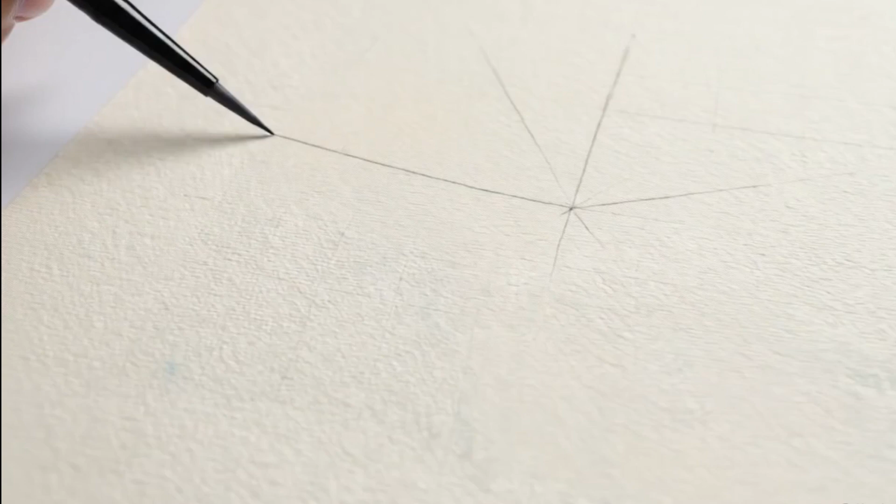Every piece of physical infrastructure begins with a mathematical abstraction. Surveying is the foundational science of determining the exact three-dimensional position of natural and man-made features. But civil engineers face an immediate problem.

The physical surface of the Earth, known as the geoid, which is based on gravity and mean sea level, is incredibly irregular. Its lumpy geometry makes direct mathematical computation impossible. To build anything, that chaotic physical data has to be translated into a smooth, computable shape called a reference ellipsoid.

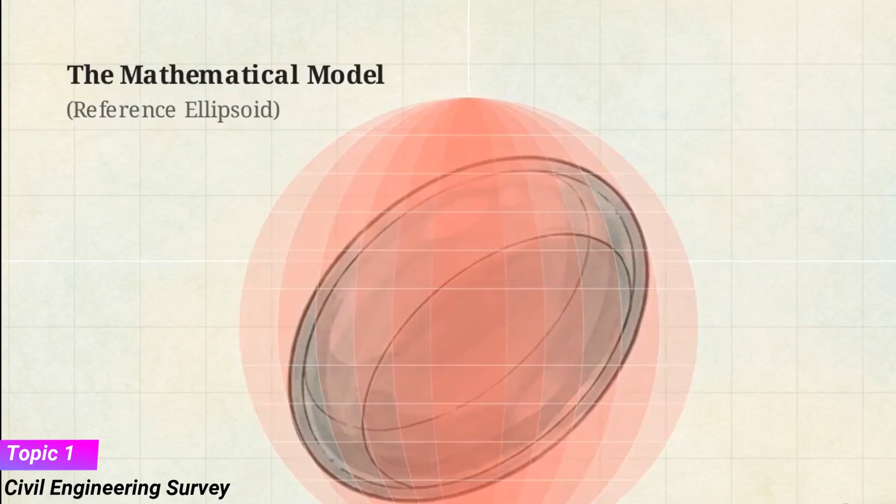For smaller, localized projects, surveyors project this data orthogonally onto a flat plane, resting tangentially against the ellipsoid, allowing engineers to work with standard plane geometry. However, this flat Earth assumption has a strict physical limit. Once a project extends beyond 10 to 15 kilometers in any direction, the curvature of the Earth creates a massive mathematical gap between the flat plane and the ellipsoid.

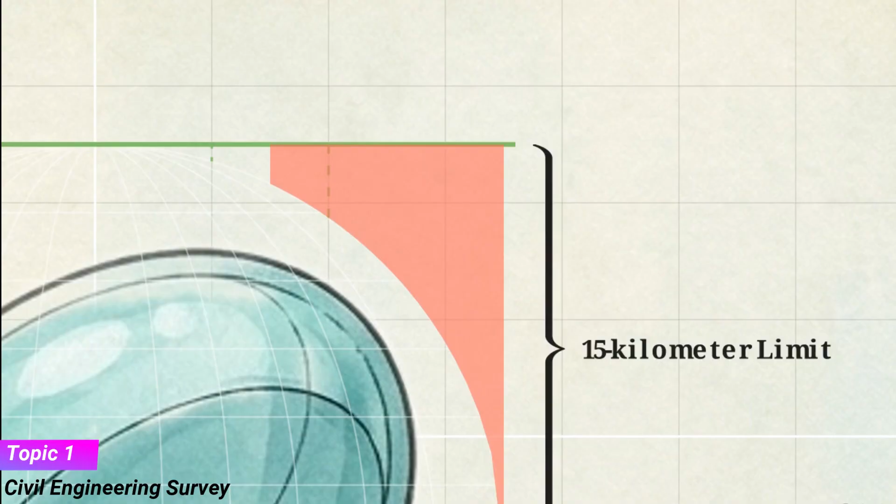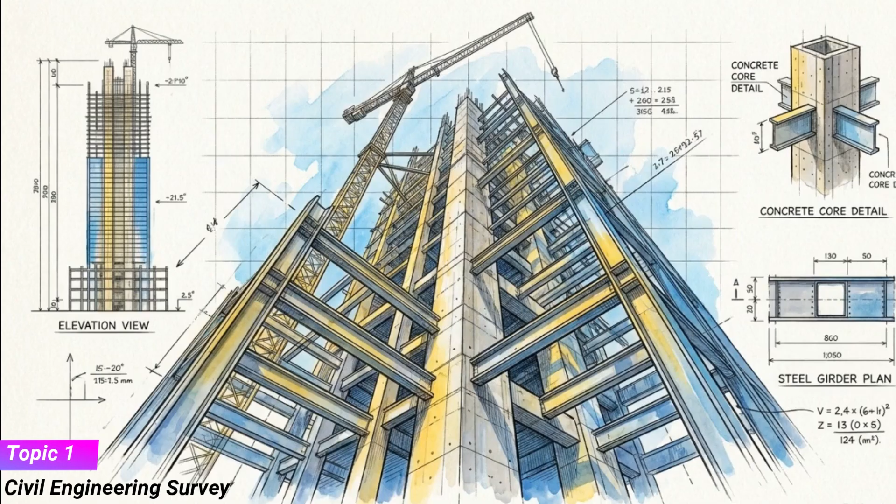Bridging that gap and converting raw planetary geometry into usable construction data requires highly specialized domains of practice. Without this precise mathematical translation and a computed coordinate datum, safe infrastructure design is literally impossible. To manage the vast scale of physical variables, spatial data collection is divided into 4 primary branches.

The first is engineering surveying. During a project's design stage, engineering surveyors capture large-scale topographical data. This forms the basis for digital ground models, or DGMs, ensuring the architect's plans actually fit the existing terrain. Once construction begins, this branch pivots to setting out.

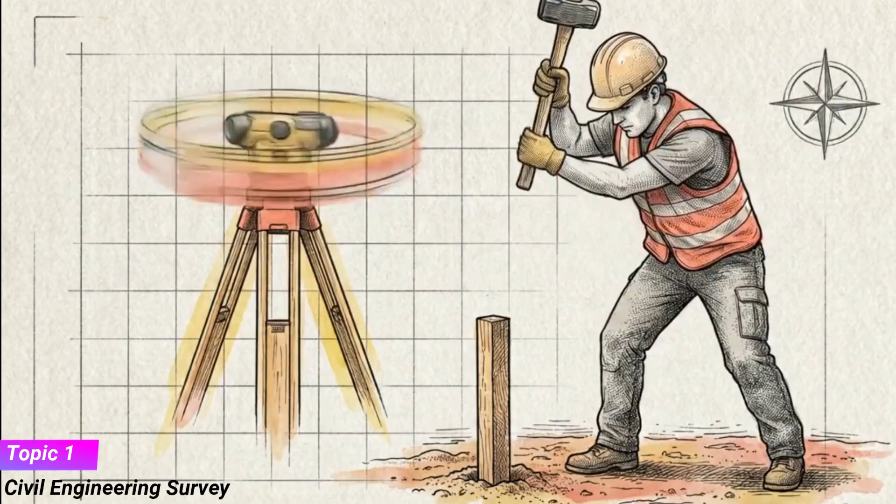This is the process of taking those abstract digital coordinates and establishing physical marks on site, guiding the exact placement of structural elements. Even after completion, surveyors remain involved. For massive retaining structures like dams or bridges, they monitor long-term deformation to ensure ongoing stability.

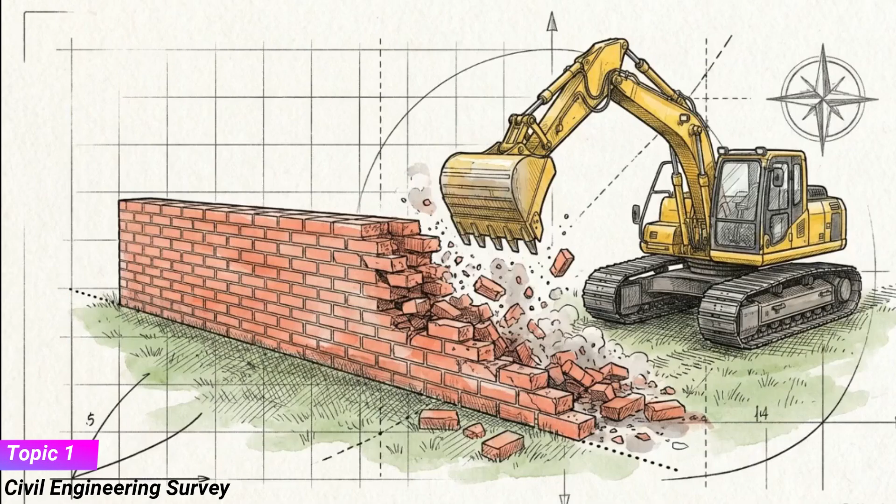The second branch is cadastral surveying, which is strictly concerned with the establishment and management of legal land boundaries. A structure built across a boundary line requires either purchasing the adjacent land at a premium or tearing down the work. Cadastral precision prevents these multi-million-dollar encroachments and territorial disputes.

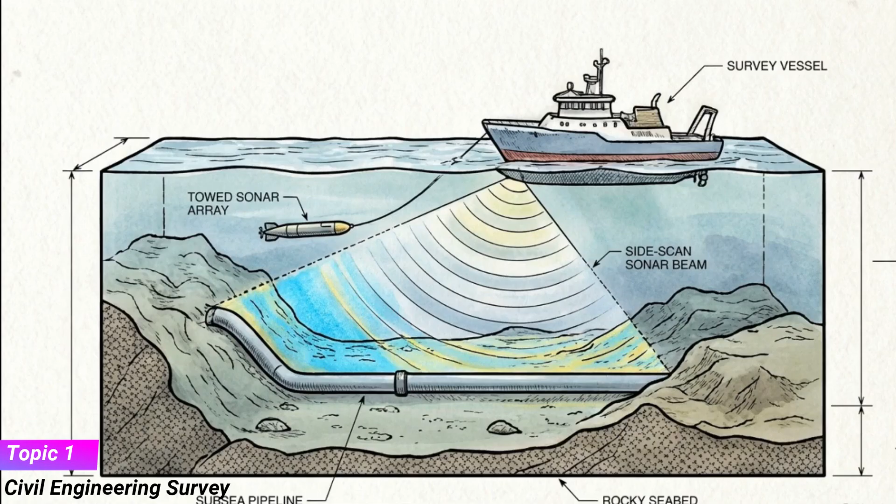The third branch, hydrographic surveying, extends this control into marine and underwater environments. Historically, this involved mapping coastlines, defining mean high water indicators, and locating seabed hazards to produce safe navigational charts. Today, hydrographic spatial data is vital for positioning offshore oil rigs and routing underwater pipelines in extreme open water conditions.

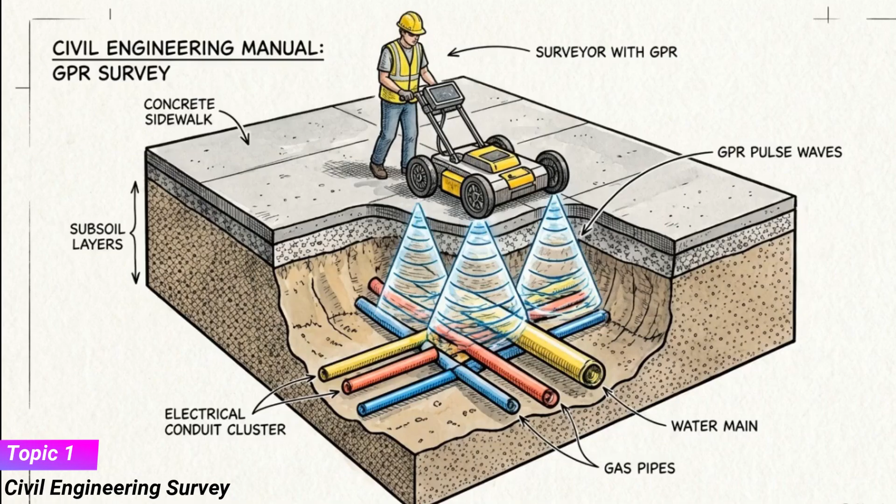The final branch is utility surveying, which maps the complex web of infrastructure hidden beneath the surface. Surveyors use non-invasive tools like ground-penetrating radar to detect telecommunication cables, gas mains, and water lines without digging. By charting these buried assets, construction crews can excavate safely, avoiding accidental strikes that cause massive outages or physical harm.

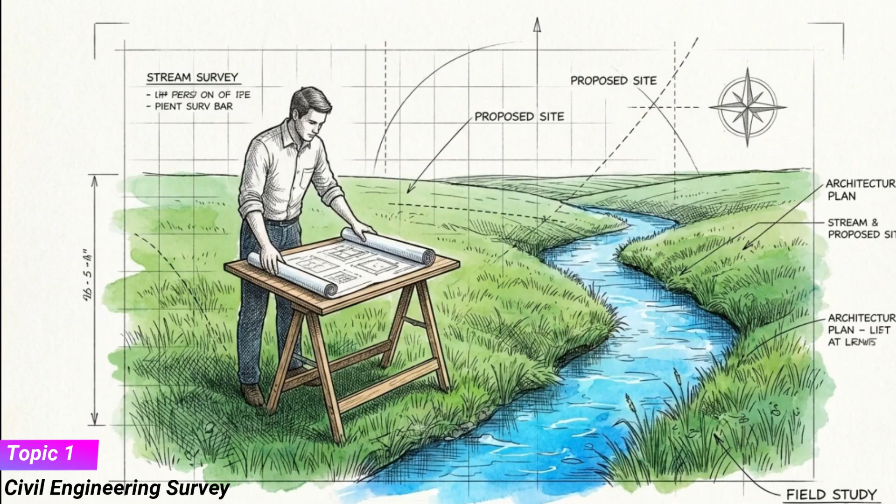Together, these 4 disciplines form a comprehensive spatial shield. They guarantee that a project is structurally sound, legally compliant, and environmentally viable before any ground is broken. As infrastructure projects scale up, they inevitably cross that 15-kilometer threshold. At this scale, teams must employ geodetic surveying, which mathematically factors in the Earth's curvature.

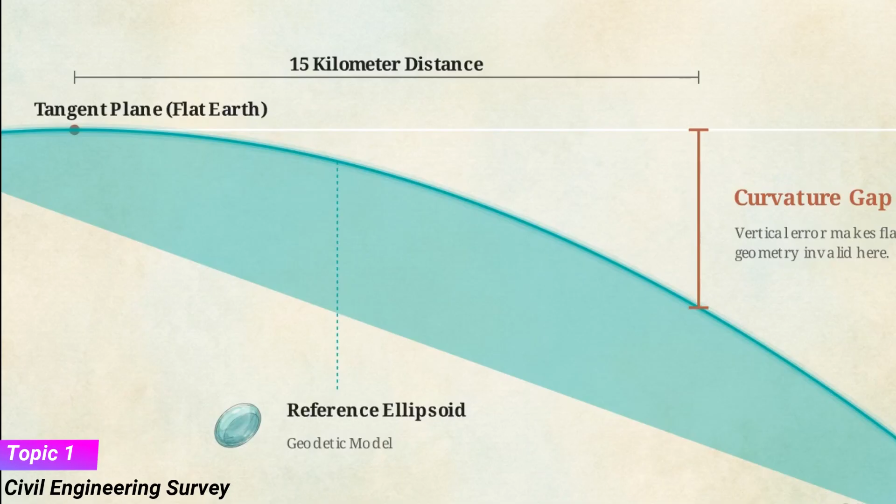Historically, achieving this relied on optical instruments. These required clear lines of sight between control points, limiting the speed and range of data collection. The solution to the line of sight problem came from aerospace. Early artificial satellites provided the first global geocentric tracking systems. This evolved into modern Global Navigation Satellite Systems, or GNSS.

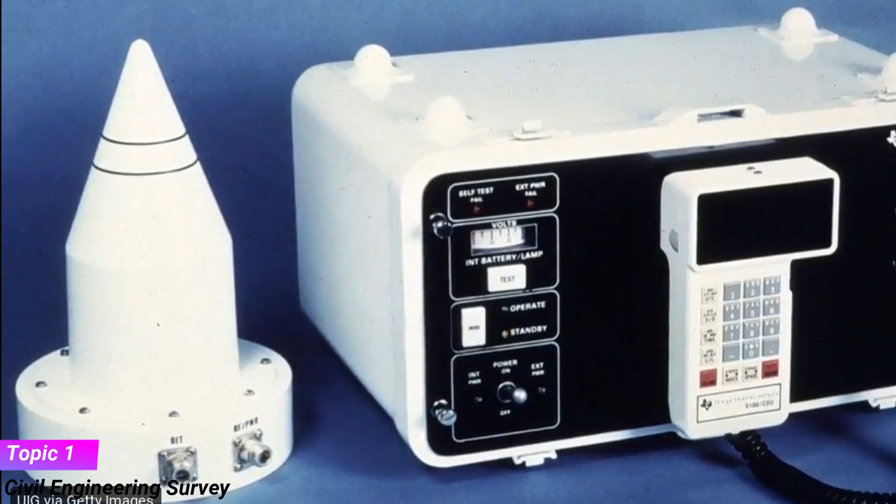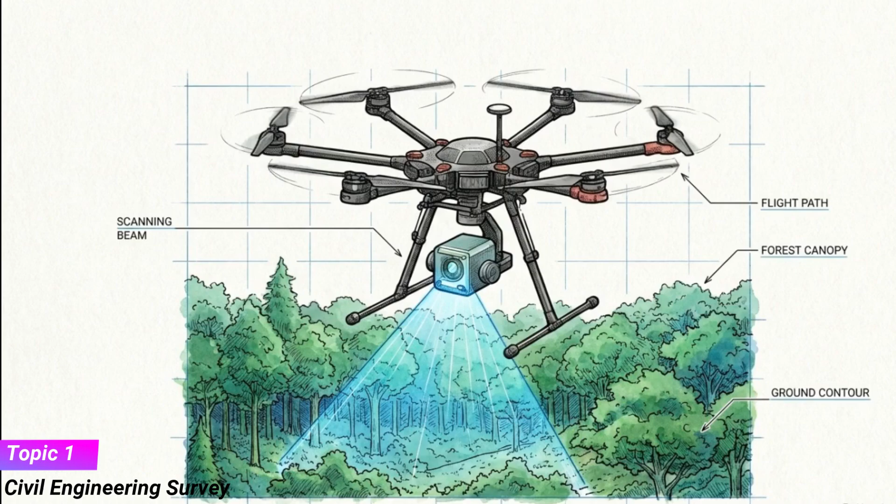These receivers compute positions within a global, three-dimensional Cartesian coordinate system, like WGS-84. GNSS technology now enables real-time kinematic positioning. This allows a surveyor to capture centimeter-level accurate coordinates continuously while moving across a site. At the same time, airborne remote sensing and UAVs have replaced tedious single-point measurements with massive, rapid aerial data capture.

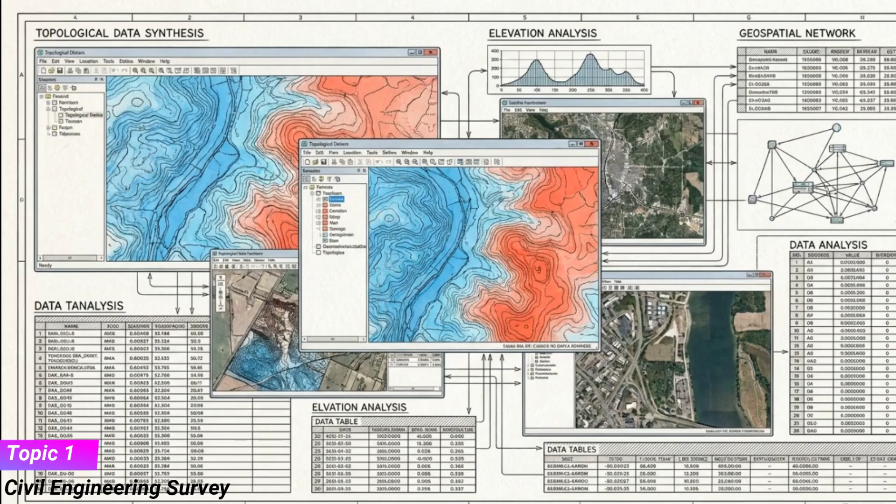For intricate physical environments, terrestrial laser scanning uses LiDAR pulses to generate highly accurate 3D point clouds, capturing millions of geometric coordinates in seconds. Managing this sheer volume of information requires a central digital hub, which is the role of Geographic Information Systems, or GIS. GIS takes disparate datasets, the cadastral boundaries, utility depths, and topographical elevations, and organizes them into specific analytical layers.

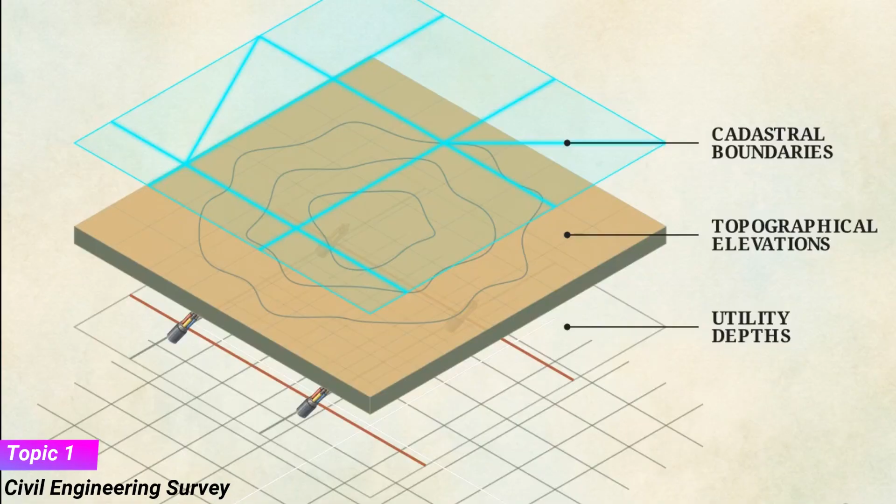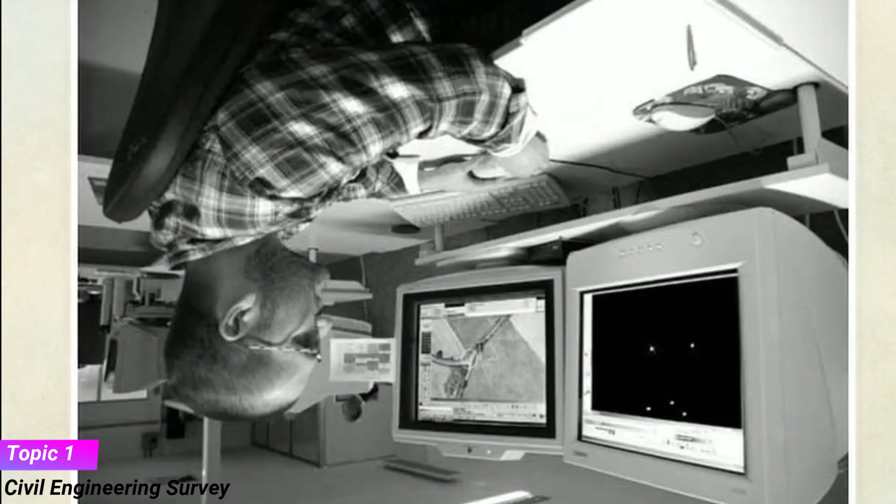The discipline has shifted from measuring individual points on the ground to managing continuous, massive digital environments. Because of this technological shift, the modern surveyor's identity has evolved. They operate as comprehensive geospatial data managers, processing and synthesizing vast information.

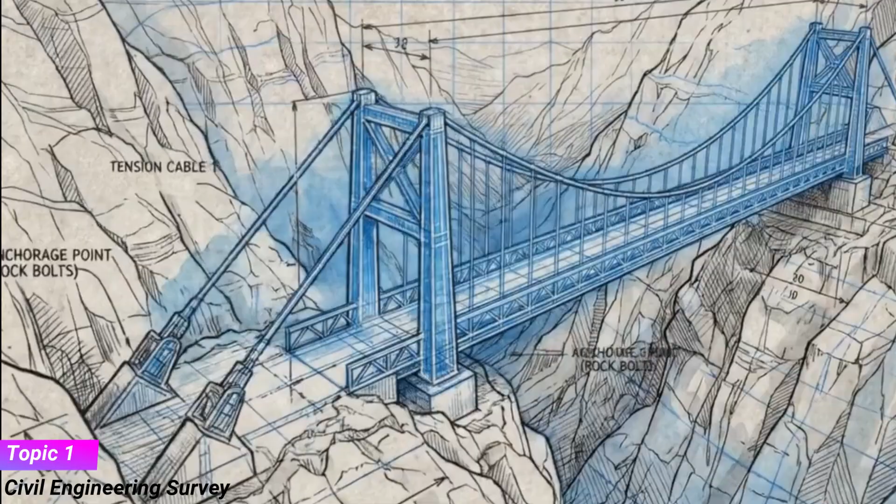The integration of GNSS hardware, laser scanning, and GIS software unifies the engineering, cadastral, hydrographic, and utility branches into a single, reliable framework. This framework is the only mechanism that ensures abstract architectural designs are actually compatible with the physical reality of the Earth. Absolute precision within the digital ground model is the ultimate guarantor of safety, legality, and viability in the built environment.